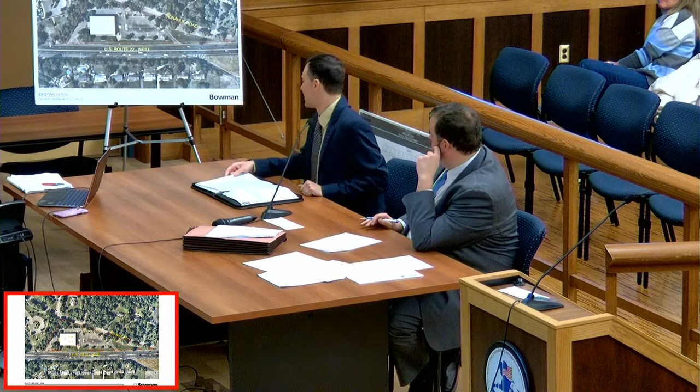Yes, certainly. This is an exhibit depicting existing aerial photography of the property in question that we're here to discuss tonight. This is Lot 9 in Block 800, outlined in red. This will be exhibit, we need a number for this, A1, thank you. So A1. Would you mark that board A1, please? Thank you.

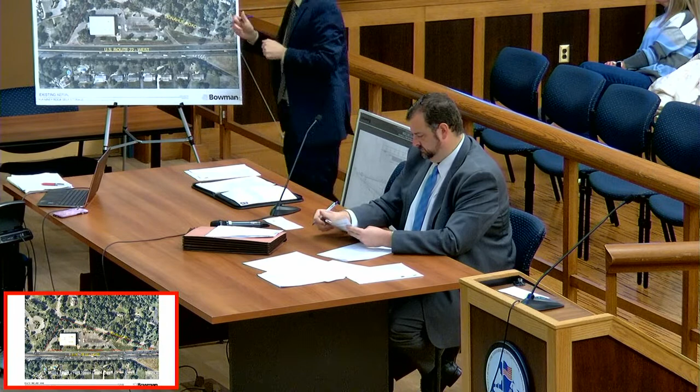All right, so our subject property is located along the north side of Route 22, which is the divided highway under state of New Jersey jurisdiction. Our property here falls within the C5 commercial and nursing home zone. The total area of the property is approximately 3.44 acres. As you can see, the site is triangular in shape. The deepest part of the lot is on the western side, and it becomes less depth until we reach the extreme eastern end, where we come to a point, which is actually where Donahue Road connects to Route 22.

As noted, we have frontage on two roads, Route 22 to our south, and Donahue Road backs up to the north.

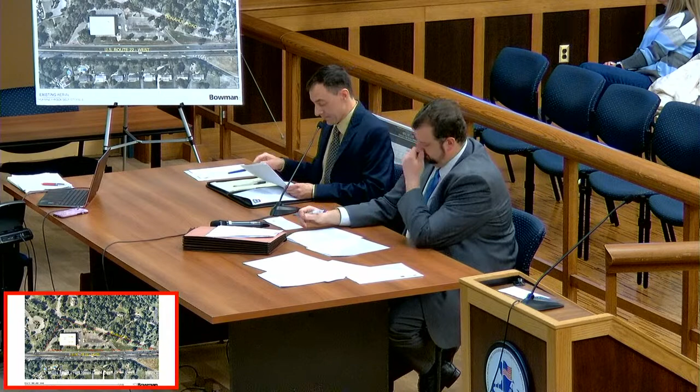The site is presently developed with a two-story office building situated on the western side of the lot, along with surface parking lots and related site improvements. The eastern side of the lot contains an existing stormwater management basin, and the surrounding area consists primarily of residential development. Adjacent uses include, to our south, single-family homes along Glen Road across Route 22. Those are at the bottom of this map; north is up on this map. Care One at Somerset Valley Assisted Living Facility is located directly to our west on the left side. There are additional single-family homes across Donahue Road to the north of the property, and just immediately to our east, just off this map, which you don't see, is a real estate agent office along Route 22.

The property slopes from the rear of the site along Donahue Road. Excuse me, you can move that microphone so it's easier for you to speak into it and for us to hear you. Thank you, I'm trying to make sure I have the volume for it. I understand.

The property slopes from the rear of the site from Donahue Road towards Route 22, with the greatest change on the west side. We're approximately 27 feet in grade change from Donahue to Route 22. As the site contains existing slopes of greater than 10% on a portion, provisions of the Township's Hillside Development Ordinance will apply to this development.

There are two existing driveways from the site, both from Route 22. There's an ingress driveway on the east side, entrance only, and a divided but two-way driveway on the west side which provides ingress and egress. There are no driveways directly to Donahue Road from this property.

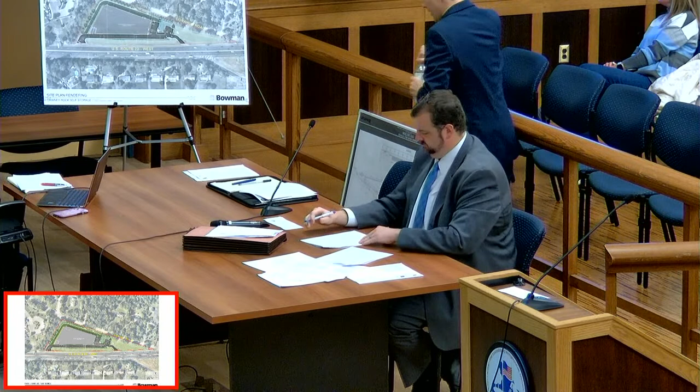This exhibit is titled Site Plan Rendering for Chimney Rock Self-Storage. This is an aerial image, the same one shown in the existing plan before this, in Exhibit A1, upon which we have placed our proposed site improvements and landscaping improvements. To match the mapping, we've colored them in, so you can see how this would look in the proposed condition.

The exhibit bears a date of November 8th, 2023.

Our application proposes to construct a self-storage facility, which includes a new 3-story building consisting of 2 floors above a cellar level, totaling 129,897 square feet. Storage units will vary in size, and a total of 876 units are proposed.

Along with this are other site improvements, including a parking lot on the east side of the building, which will contain 19 parking spaces in total.

Although the municipal ordinance does not have a provision for the parking requirement for self-storage facilities, we relied upon the Institute of Transportation Engineers' current edition to determine what parking quantity would be suitable for these uses. We calculated 19 spaces is consistent with that, and we feel that's appropriate to serve both customers and employees for self-storage facilities of this size.

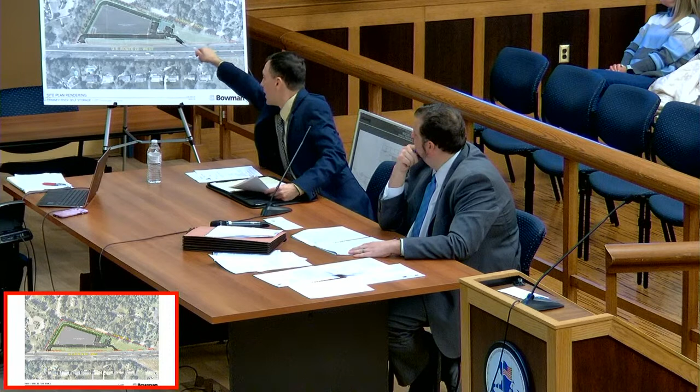Refuse, and there is an additional uncovered loading space delineated in the main parking area to the east of the building, off of the main drive aisle.

Could you point to that parking again? Certainly. That's right over in this area here. So we have one uncovered loading space here, the 2 covered spaces in the building here, and just to help better delineate, this is the main parking area on the east side of the building. Larger vehicles for these spaces can bypass and come to this end of the property.

Refuse and recycling collection will occur on the east side of the building, where there's a proposed dumpster enclosure at that location. These collection services will be managed through a private hauler.

We would like to note that we are going to resolve a design waiver issue that was brought up in one of the review letters and reduce the height of the trash enclosure from 6 foot 8 inches to 6 feet maximum, to see if we could eliminate that non-compliance.

So sorry, can you give me that number again? Yes, sir, we're reducing the proposed height of the trash enclosure from 6 foot 8 inches to 6 foot even, which will comply with the ordinance. Maybe I stated that incorrectly—6 foot 0 inches proposed, which complies. I apologize if that was unclear. Your original was 6.5, now you're going to do the 6 foot. Yes, we're going to reduce the height to comply. I'm sorry if that was unclear. Okay.

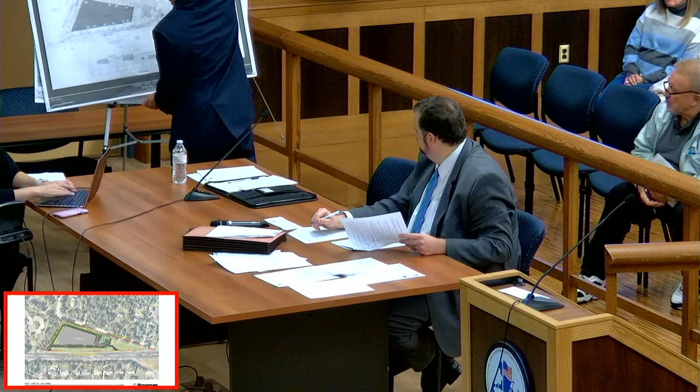And once again, Mr. Winters, identify it by title, date, and mark it as A3. Please put today's date again. This exhibit, now Exhibit A3, is titled Chimney Rock Self-Storage Site Section. The date on the exhibit itself is November 3rd, 2023.

What we are depicting on this exhibit is the grading plan from our site plan set as submitted, as well as a line illustrating the section taken through the property below. If I point here on the right side of our section view, this is where Route 22 is, which is at the bottom of the site plan view. You can see the grade comes up. The existing grade is dashed, and the proposed grade is in solid.

Now, at the particular location we've taken this, I do want to note we selected this location for a couple of reasons, although at this location we're not embedded into the hill quite as much as we are further to the west of the site. As I noted, there's more.

When you say this location, could you actually point to it, please? You can get up, yeah, it's better. I've been keeping myself pinned to the microphone so I'm heard, but Steve, is there a wireless out there? Can you hear me? Yes. That wireless works really well when you keep it very close. I'll do my best.

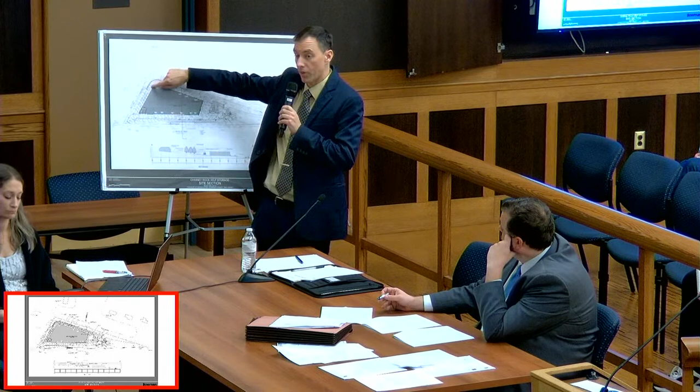Actually, I have elevation for that floor of 124.5 down here. You could see these contour lines indicating we're coming up that grade along the side of the building until we get to closer to that 134, 135 grade. So if you stand here today, and in fact, having been at the site, this isn't very different than the driveway that's on this side of the site today, which you could actually make out in this exhibit. It's right in the same spot.

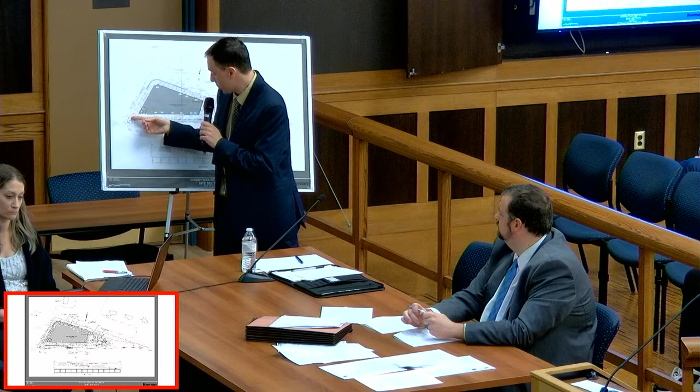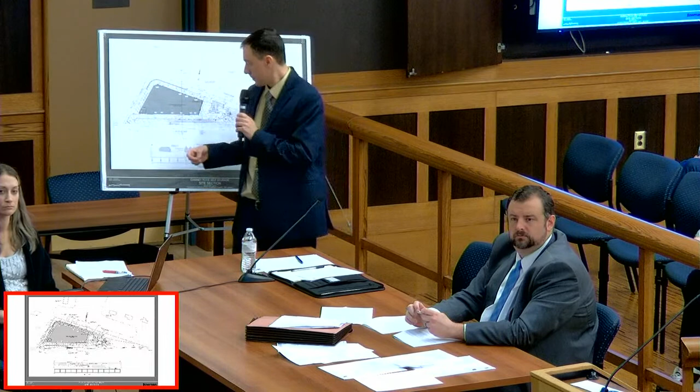So there's a change in elevation of approximately 13 to 15 feet? Along the side of the building, yes, we're going from, at Route 22, about 118, to the very back corner at 135. Thank you. Again, we're—question on the drainage, once again. Let me finish.

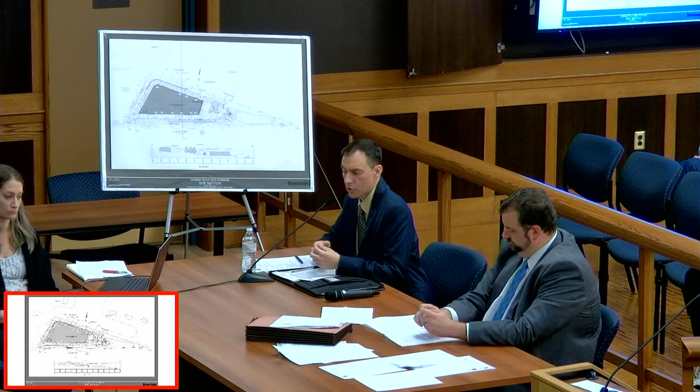So you testified early on that the steep slopes ordinance is in play. Can you tell us why that is, in fact, the condition of this property? The steep slope ordinance is in effect for any properties where you have greater than 10% slope. Different factors apply that effectively reduce certain bulk standards. So going back to my question then, if we're in play on the steep slopes ordinance, what is the change of slope from the northernmost point to Route 22?

And Mr. Winters, the reason this is important, and the reason we keep asking it and the board keeps questioning it, is because literally a quarter mile to the west, someone died in 2019. They were swept away by water. So this is so important. I'm not making any statement that your application isn't addressing these issues, but why does this board keep coming back to these points? Because someone died. So maybe you can try and answer my question again.

I just want to ensure I can best address the question in context of what we're proposing here and what we have in the ordinance. Mr. Winters, what's the slope? What's the change from the northernmost point to the southernmost point? Well, in the context of the zoning ordinance, it's not specifically relevant to what the ordinance for hillside development says, as I understand it, unless I'm missing a point. I don't mean to—I just want to ensure I'm best addressing your question, sir.

I will calculate the slope to ensure I can give the correct answer right now. The average slope along our western property line is 7.8%.

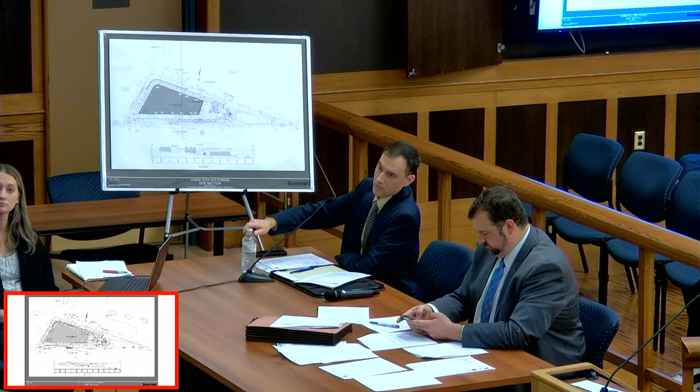So I have a grading plan, sheet 5 of 12. There's a separate sheet 1 of 1 steep slope exhibit, which was in the original submission. Had I had that, being the diligent chairman that I am, I think I would have had the answer and not asked it. So why don't we either take a break and you can supply us that information, or at some point, I'd like to see, and I think the board would benefit, as well as members of the public would benefit, to know the slope on this property.

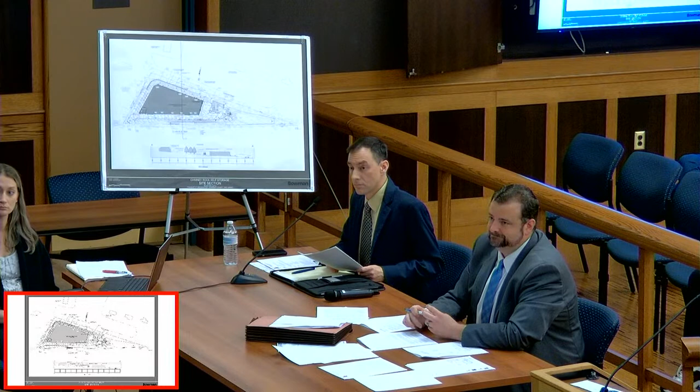Sure. And I hope the gravity of what I said, and I don't mean to be dramatic and I don't mean to play it up, someone died. I think it changed how I view every single case, and I don't want to speak for any other board members because I'm only one vote. But it certainly changed every single way I look at every single application, from resident to commercial. And I hope you really take that into account when you give your testimony. Thank you.

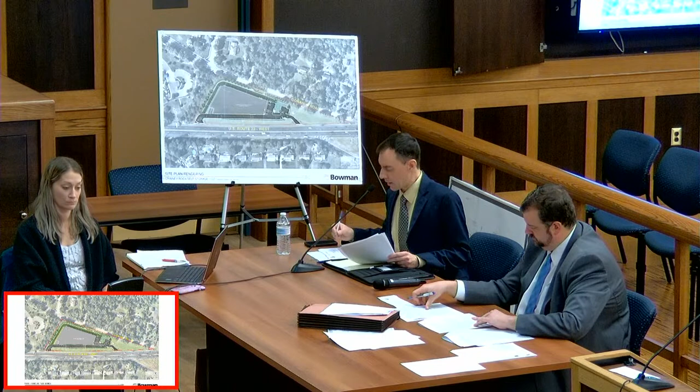We are also going to make a modification to the plan as proposed. Per the planner's letter, we were deficient on our setback. We were at 23 feet for the sign instead of 25. We will happily increase that setback to comply and provide the 25 feet setback for that sign.

So this plan is also good to point out, since I wanted to talk about lighting and landscaping proposed with this project. We'll be providing lighting through a combination of pole-mounted and building-mounted LED fixtures. A total of 4 light poles are proposed mainly in the parking area on the east side, and we're using building-mounted fixtures to provide illumination around the front and sides of the building.

The pole-mounted fixtures will be mounted at 20 feet in height, and the building-mounted fixtures vary from as little as 8.5 feet to 26 feet. The reason for that has to do with the elevation, as you'll see in the elevation views the architect presents—the front elevation, where we have more exposure of the facade, is taller than at the rear of the building. We'll have the lower mounting heights along the west and north sides, and the higher mounting heights correspond to the front of the building.

Fixtures are all dark sky compliant with zero uplight, and we've designed the site lighting to ensure there's no spillage onto adjacent properties. So the design will meet the township requirements for lighting.

The site will also be landscaped with a variety of trees, shrubs, and grasses. This includes plantings based upon the township's planting standards. The majority of landscaping is provided on and along the site perimeter. As you can see, we have proposed landscaping along the sides and the rear, as well as along the front.

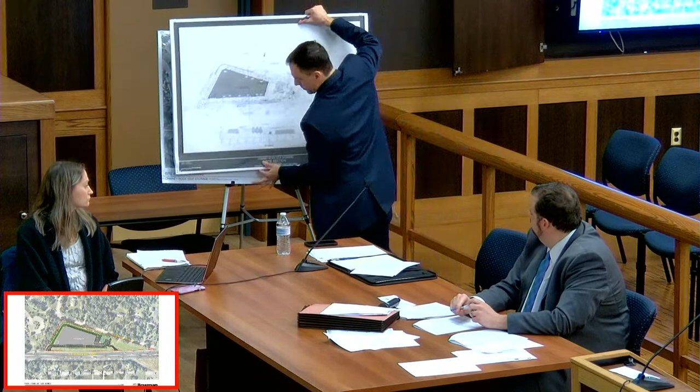This is a good moment just to talk about that. What we are showing at the rear of this building, and this is an estimated 15-foot height at about 5 years of growth for this particular species. Half the size of the building.

Not yet, but they are being planted at a higher elevation, they'll be at the top of the retaining wall. At this point, where we've drawn this, we're only at a 3-foot high retaining wall. Where we have a 6-foot high retaining wall, these may be 15 feet at that point, but at this point it's effectively 18, and at this point it's effectively 21 feet. So it's helping to absorb some of that visual from Donahue Road.

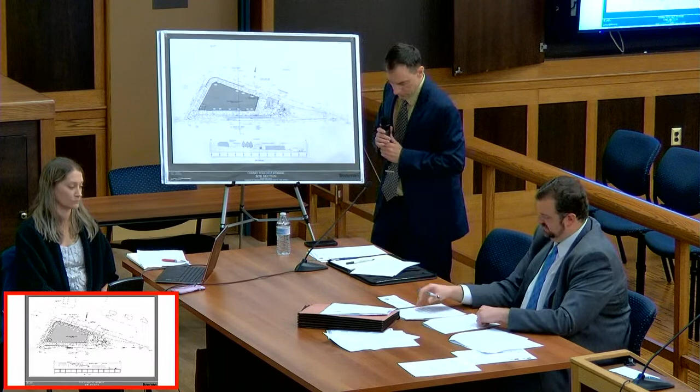Thank you. In light and consideration of the non-compliances we are looking at with some of the provisions of the landscape standards of the township, I do want to offer that subject to approval of the application, we're certainly willing to review this matter further with the planner and try to see opportunities and ways we can maximize the plantings on this property and try to be more compliant with those provisions.

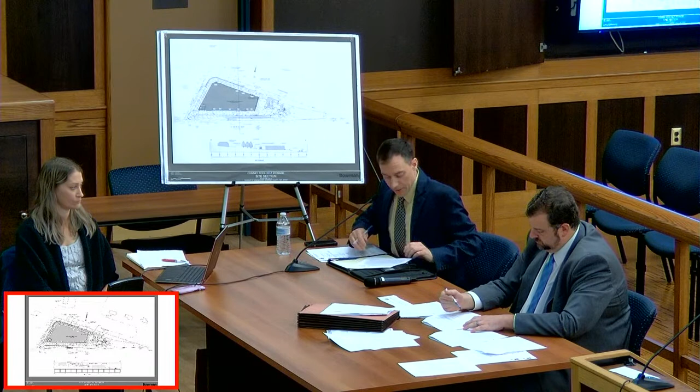Having established that, I do want to turn back to talking about utilities and stormwater a little bit. And for that, I'm just going to put A2 back up because it's more useful for that.

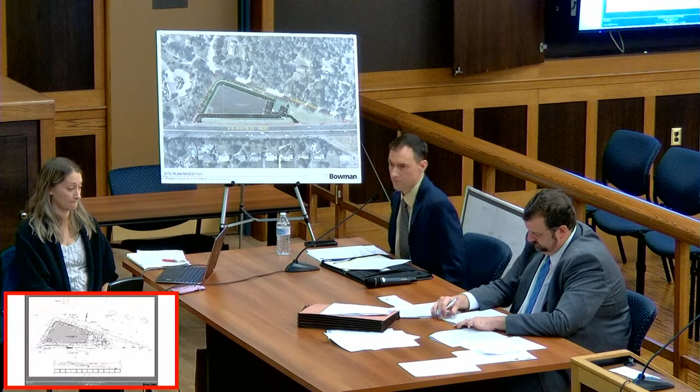We're back at A2. The A3 was just relevant to the landscape discussion, which we're going to talk about utilities for a moment.

Our project will propose new utility services to this building, including electric, telecommunications, gas, water, and sanitary sewer. All services will be provided from the Donahue Road side of the property, consistent with how they're provided today. Overall, for these kinds of facilities, there's typically reduced demand for water and sewer, which we've calculated, versus the existing office use.

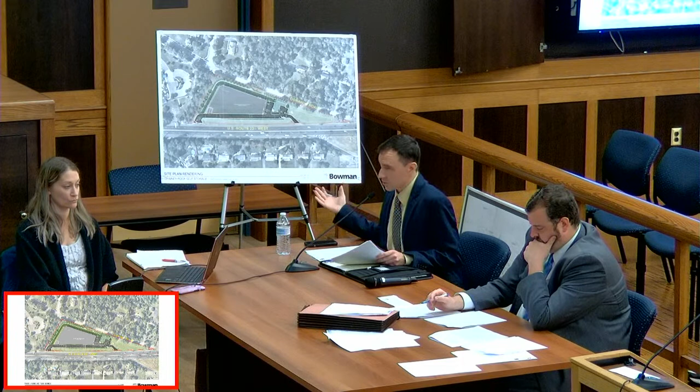Our project is designed to address stormwater management as outlined in the stormwater report submitted with this application. On the basis that our project will disturb more than 1 acre, we qualify as a major development under the DEP stormwater management regulations.

So for that reason, we've analyzed and evaluated the site to comply with those rules. There will be a decrease in parking lots, which is a benefit because that's typically associated with an improvement in water quality. We are exchanging parking lot for building on this application, to the extent that we're actually going to be increasing the existing impervious cover with additional building.

The total increase, in addition to maintaining our existing stormwater basin on the east side of the site, means that in order to account for the additional runoff from those impervious surfaces, we'll be proposing a pervious pavement system in this parking area. That's the green-colored part of the parking lot here, as opposed to the regular asphalt pavement sections, and that'll be sized to provide additional quantity control and attenuation of flows before they're discharged from the site.

Our system is designed to meet the current DEP green infrastructure standards. That is an approved green infrastructure best management practice, so we can comply with the quantity control requirements, and all other requirements in our report are noted as addressed. We don't have any further obligation to meet water quality requirements by virtue of the reduction in vehicular pavement surfaces.

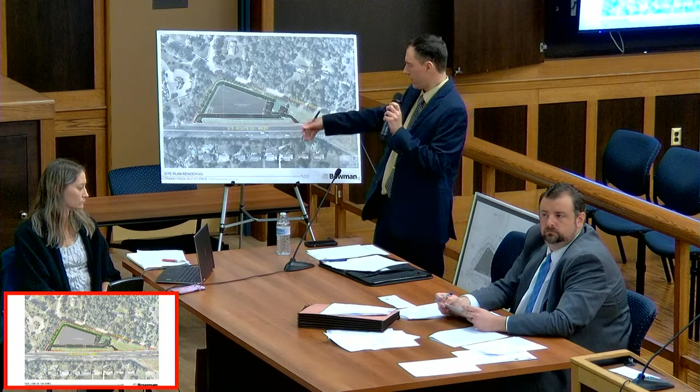Yes, where your pipes discharge into your retention basin. So the surface of this is in the 132.5 to 134.5 range, then we have a layer of paver stone underneath that. The discharge elevation is set to ensure we have positive drainage to the detention system, the existing basin, so we'll be piping in this direction so that everything continues to drain towards the eastern part of the site. Okay, and the eastern part of the site is more of the high point?

The eastern part is, the grade on 22 is a little higher here, but compared to this part of the site, everything drains in this direction. All right, so do you have the pipe invert elevation of where it discharges? I may have a sheet with that on it, if you could bear with me one moment.

The invert out of the underground detention portion of the pervious pavement is 129.0. Okay, and then on the west end of the site, where it exits onto US 22, what's the elevation there? The roadway elevation at Route 22 is about 118, 117. Okay, so it's 10 feet lower than the retention basin.

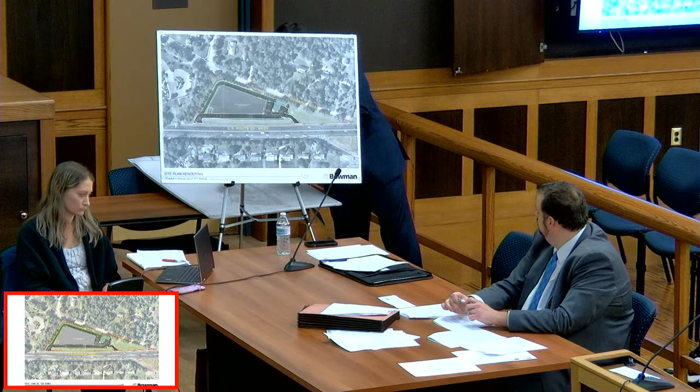As currently designed, a portion of the site in its existing condition... Okay, so all that water on that side that's lower than the retention basin, where's all that water going? Much of that water directly discharges towards Route 22 today.

The DOT only permits stormwater to continue in the direction of flow, so for portions that currently drain in that direction towards that driveway, they're going to continue to do so in the proposed condition. We're not increasing that; we're maintaining existing drainage patterns.

Question: if it rains an inch an hour for 6 or 7 hours, will that detention basin be able to accommodate that without overflowing? Our basins are designed to the standards to account for all storms up to the 100-year frequency, which is the 1% chance storm, itself a 24-hour duration storm. Right now our requirements are more than 8 inches over that time period.

High-intensity storms are considered in water quality calculations, but what I can offer is that the design does comply with the requirements in place, and since we're under the current stormwater rules, that includes the current iteration of the stormwater regulations, which are more restrictive than prior ones. I'm not an engineer, so I'm not sure I understand — if it rains an inch an hour for 6 or 7 hours, will that detention basin accommodate that?

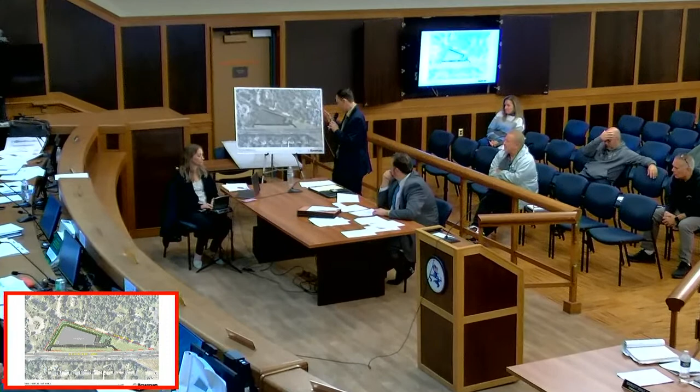In the existing condition, this part of the site is developed and it drains this way. The existing driveway, much like this proposed access, runs at a lower grade — it comes down quicker. This little portion of the site, in the existing and proposed conditions, discharges right to Route 22, and we're not increasing what's going to 22 as a result of this application. Everything going this way, we're going to deal with in accordance with the rules and proper design standards, which is why we have the additional storage.

Mr. Winters, there's no pumps in this plan, so no need. Basically, anything at 129 feet or above is going towards your basin, correct? Yes, anything higher than that is going to the basin. It connects into systems on the eastern side, which are at a lower elevation than we're detaining the water, so that way it can get out.

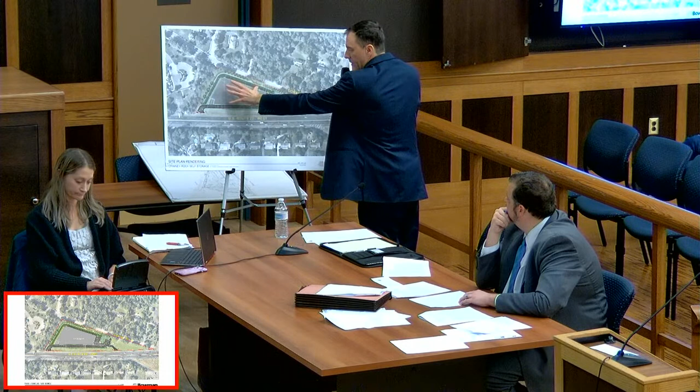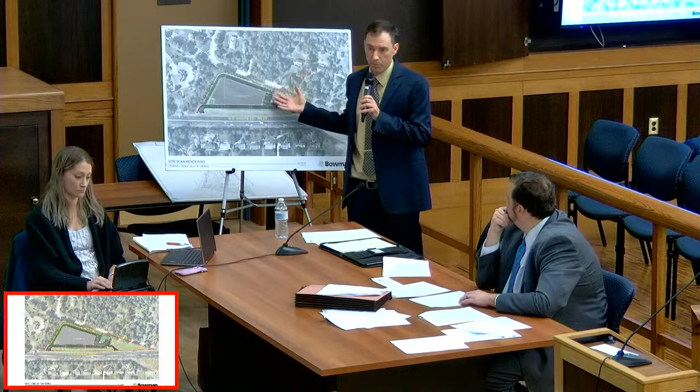The exception here is that this pocket of the site, beyond this point, we're at elevations 134, 132, 130. From about here down is where we get to a point lower than that, and once we get beyond a high point, there's a portion of the site that drains directly to Route 22. So that doesn't influence this system. This system continues to function to take the majority of the site in that direction. Again, we're matching drainage patterns because that's what's obligated to us — DOT in particular requires we match drainage patterns. So we've designed it in accordance with that. To your point, we're improving the site by providing additional storage of stormwater in this part of the site.

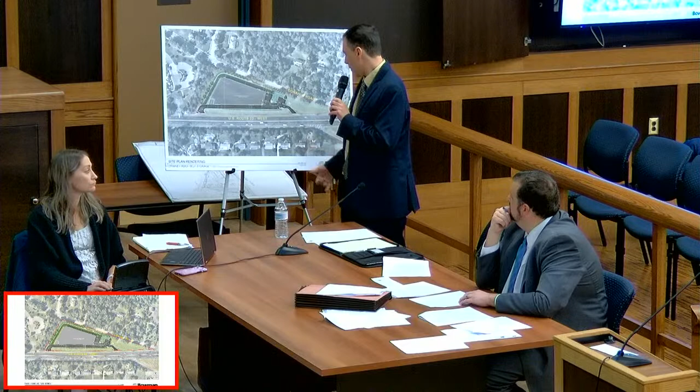So we can hold back, attenuate those flows, meet the required reductions in peak rate of runoff, things required under the rules. Paul, your comment just now in response to the chairman's question that pumps aren't necessary is because pumps would only be required if you're servicing the drainage at lower elevation on the west side, which you're not, because that's an existing condition, unaffected by our proposed building. Yes, that's a correct conclusion.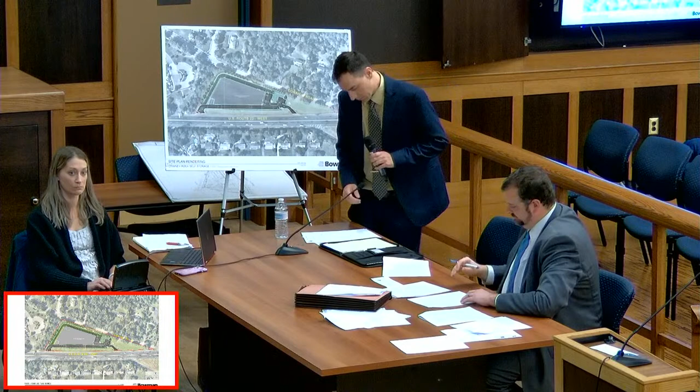Just to add to that, Mr. Chairman, if I could touch on the DOT coordination on this project - have you already filed with DOT, and have they approved the proposed drainage configuration and drainage patterns being put forward on the plan? We're preparing that now. I was just about to get to my traffic testimony, and what I was going to note is we're actually going to be preparing a letter of no interest based upon the trip generation and the fact that we're not altering driveways. We will comply with the stormwater provisions DOT requires. Obviously, if we change something, they will need to approve that.

Right, okay. And just to confirm, the entire roof area will be managed by the new additions to the system - none of the roof area is discharging. That is correct. So the majority of the impervious area is all going to be managed through the basin on this side of the site. So we're capturing all that water.

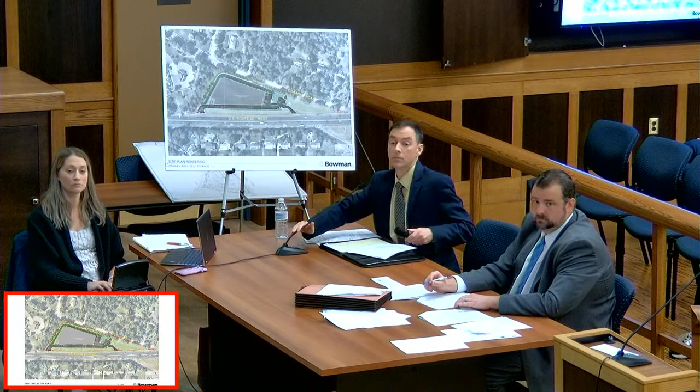I'd like to proceed with the traffic unless we need to touch on anything else. Are there any more board questions on wastewater and drainage? Board professionals, are you good? Moving on?

I just want to handle drainage right now, wastewater - I want to make sure we're all satisfied because this is very important to everyone here, I know. Mr. Chairman, I'd just like to comment that after a major rainstorm, maybe once a year, there is actually debris brought down Donahue and Vossler to the east of this site. It's not a 5-year, 10-year reoccurrence - it's actually fairly, a one-year storm is pretty much the interval, but that is something.

So is the applicant aware of that condition on the site? I'm not personally aware of that condition. It is possible to have higher intensities with shorter duration storms, like a water quality event, that may make that happen. A summer storm tends to move things more than you might expect. So that observation doesn't surprise me, but I wasn't specifically aware of that condition here.

All right, thanks. So then the retention basin doesn't factor in any runoff coming off the mountain - is that what you're saying? It's only factoring in runoff from the site? I mean, it's a mountain there, we talked about the slope a little bit. It's primarily our site. In our stormwater report that we submitted, we delineated contributory areas to the different parts of the site. I'm aware there are some inlets along Donahue Road, existing condition, that pick up some of that Donahue Road drainage. Anything we delineated that was outside of that may actually be in our numbers if it contributes to our site.

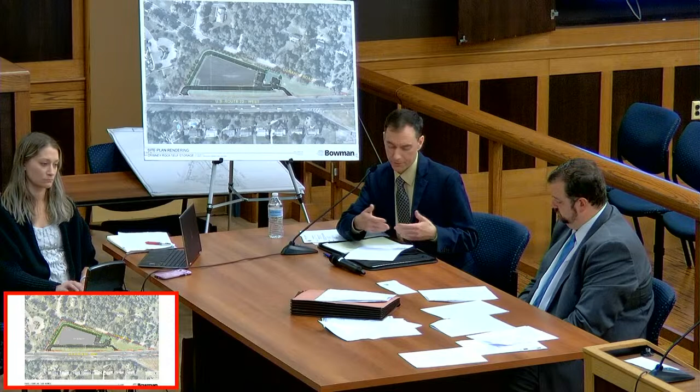The data given here, regardless of the hours of operation, the ITE establishes peak flow. The Institute of Transportation Engineers establishes criteria and rates related to different uses in different parts of the country. With that information, we can estimate what would happen in the peak AM period, generally 7:30 to 9:30, or the PM peak period, generally 4:30 to 6:30. The weekend, Saturday peak, is generally 11 a.m. to 2 p.m.

Now, Mr. Winters, not necessarily you, but what are the hours of this facility, so the board can weigh this testimony? And if you don't know, you can say you don't know. My understanding is we're open, but I'm going to allow the applicant's operator to speak about that. You don't know definitively? No. The applicant here?

Before you do, just state your name for the record. Please identify yourself. Matthew Lang, co-founder and CEO of Snapback Self-Storage.

As it relates to hours of access and operating hours, the site will be open for customer use from 6 a.m. to 9 p.m., 7 days a week. The office, staffed by 1 to 2 employees, will be open 9 a.m. to 6 p.m. Monday through Friday, and on Saturdays from roughly 10 a.m. to 2 p.m., closed on Sunday for the office.

So you're not a 24-hour facility? We're not. When we come into new locations, we match the market. In this market, the standard hours for access across every location in the area are 6 a.m. to 9 p.m. If someone stores things in your facility and gets a code key or access code at 9:01 p.m., they will not be able to access this facility?

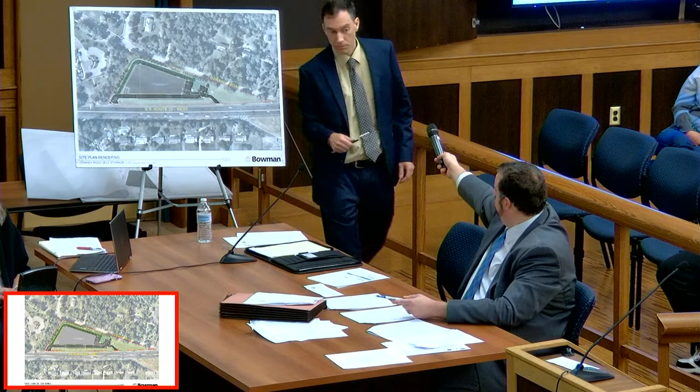Thank you — the two loading spaces on this end are striped at 30 feet. There's a little room behind them, an additional 6 feet, but they can accommodate up to a 30-foot length truck. This loading space can accommodate up to a 50-foot length truck if needed, but that's larger than what they typically see at this kind of facility.

Right, and there was a question in there — what would be, for an individual with a standard automobile license, the longest truck someone could rent? I unfortunately don't know the answer to that. That's it exactly — not a commercial license, just standard residential — what length truck would that be? I guess, would that loading dock accommodate the largest truck that an individual with a standard Class D license could rent? I'm going to see if the witness who's going to operate this can offer on that. My expectation is we are accommodating the size they need, because this is a building they've reviewed and are content with this provision, but I'll let them speak to whether there's any concern.

Sure, thank you — and the answer, if we need it: Mr. Vesco, it looks like the largest U-Haul is 26 feet. Okay, thank you.

My other question is on the parking spot. The ordinance generally calls for 9.5 feet by 18 feet, and you're proposing 9 feet by 18 feet. For this type of facility, what are your thoughts on reducing the stall size, considering the activities someone is performing with their car?

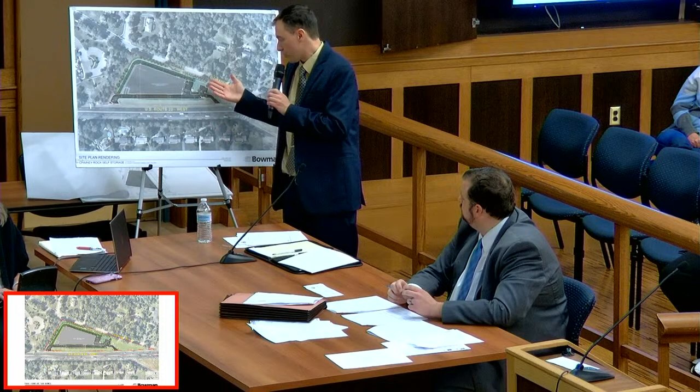Understanding that's the standard for the 9.5 in town, the 9 foot is, in most instances including several other jurisdictions, the standard 9 by 18. So it's not a compact space by any stretch, but understanding it's less than required, I noted earlier one reason we're not concerned about that is we're providing additional room at these front spaces. So if people have something larger they need to unload and need the side doors for, they have that option. I also feel since we have more SUVs with rear hatches, that's not as much of a limitation as it might have been with sedan loading.

But at 9 feet width, we're not significantly narrow compared to a standard parking space. We're actually at a standard. It just happens to be highlighted because it's a departure from the standard, and I wanted to ensure that was noted.

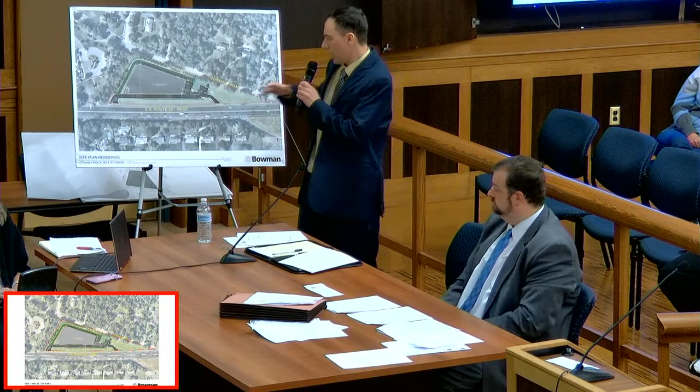To comply with that would either require a reduction in parking spaces under the current footprint, or some additional impervious cover to accommodate the extra half foot per space. I have almost 7 more feet of width on this side here. And that would be on the assumption that everyone showing up at the same time would have to open their doors, which is not necessarily what would happen.

Other than that, what do we have left? Just briefly wanted to touch on outside agency approvals that are or may be required for this application.

We have already applied for and been granted approval from the Somerset County Planning Board, completed in July. We have filed with the Somerset Union Soil Conservation District, and they have also certified this. These have been reviewed and found consistent with their standards, with any comments addressed. We will be filing a letter of no interest application with the DOT, as we're not producing any traffic that achieves the level requiring any other permits from DOT, and we're not changing those driveways.

Apart from that, we wanted to speak briefly about other reviewer letters. We did talk about the fire review letter up front. We also received a letter from the sewer utility, which we have reviewed - the letter of November 3rd from Mr. Genova - and we can comply with all comments noted in that letter. No objections to Mr. Genova's comments.

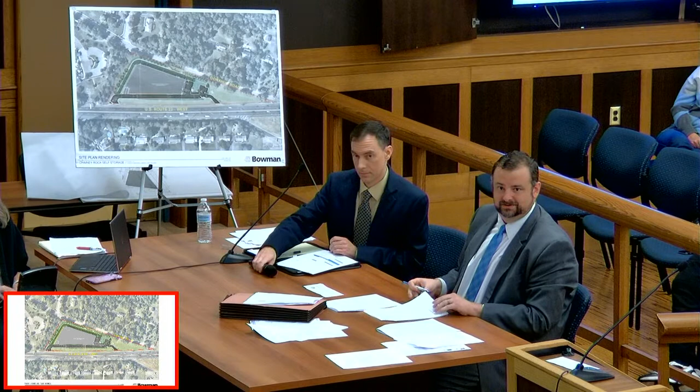Is there a list of the things that your testimony is relevant to? Because we have numerous requests for variance or design relief and so on. We're trying to follow along, but the scorecard gets confusing. Maybe as a suggestion, if we started with 'we're asking for 22 different things to be relief from, and I'm going to provide testimony covering 12 of them, here they are,' that would bring more clarity to the case you're trying to present. Right now I don't know what those are because honestly I've lost track. I don't expect members of the public were following along - if they are, maybe they can explain it to me when they get up. But right now I'm not clear.

We can certainly do that, and I think Ms. Doyle's letter is a good place to do that. Yes.

I think that would be helpful because I've only been on this board approaching a decade, and I've never seen this many variances requested in one case. Not a judgment, just a fact.

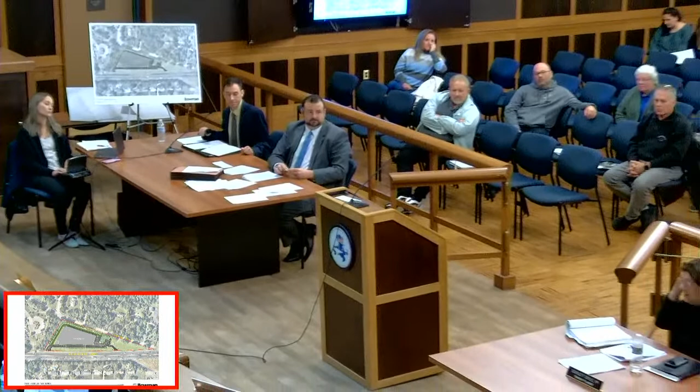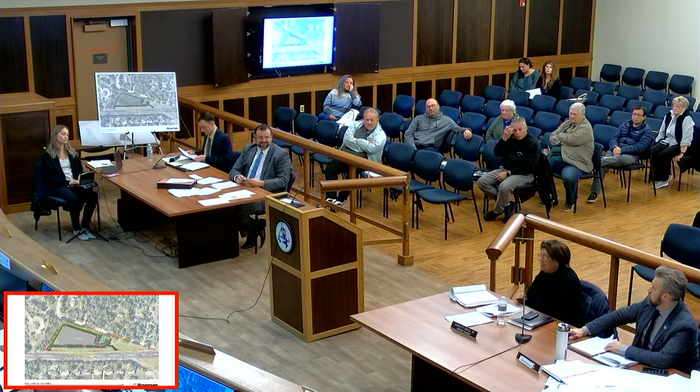Created at the wishes of the owner, the engineer does the design, and the planner is expected to make it work. The planner is expected to say it's reasonable, but that's not the basis upon which a C variance should be given. It should be based on hardship - is it narrowness, slopes, wetlands that would prevent a designer from creating a 9.5-foot wide stall? So don't leave it up to the planner to try to save the day. The engineer should, through all of these - other than the fact that you've got a unique geometry of the site, we know that - I'd like very much for the engineer to say it is not possible to provide the 50-foot conservation easement.

It's not possible to design a lot coverage in accordance with the ordinance, irrespective of the fact that his client doesn't want him to. We're talking about the land, we're not talking about the owner. We're talking about the land, and that's what I'm afraid might be missing in his statement. So if he can talk about it in those terms, and if I could have the right to interrupt, that would be really helpful, so that the board knows. You always have the right to interrupt, no matter what.

Thank you so much. Thank you. Thank you.

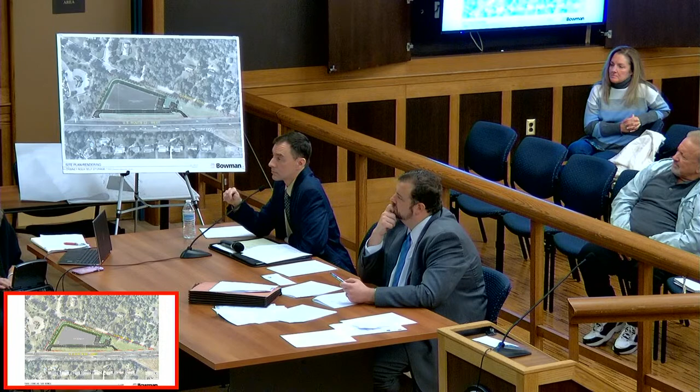Can we pull up the image of the slope again? I want to talk about, I couldn't find it in my packet. I'm sure it's... A3, thank you.

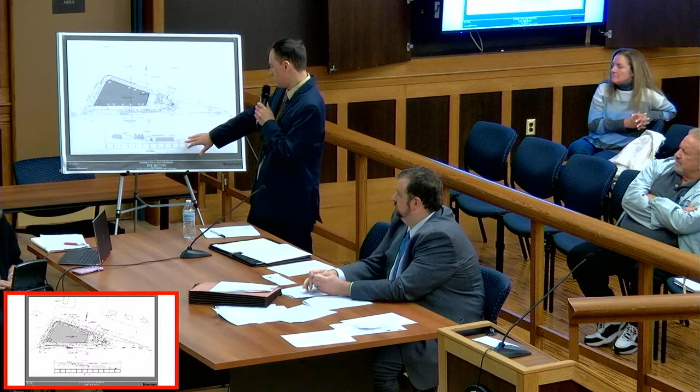Again, there's a neighborhood back there. You've got a giant flat roof. I'm trying to understand, I'm trying to get clarity on these sets of trees. So from right to left, we've got the building, we've got a small set of trees, and we've got some space, and then we've got some large trees. Can you just identify for us what is what?

This is a rough representation. There are trees that are along this side of the road. They're outside the right-of-way, they're over here. I just wanted to account for them in this, just to understand what's there today. But there's a wooded area here. There's a house here that sits so far back, it didn't even make the exhibit. And there's wooded areas that fall in the front of some or most of these houses.

Yeah, I'm familiar with it, I was there. Okay, what are the bigger trees, is that what you're saying? Those existing trees, those are the big trees there in your image? Yes, these are the existing trees. Those are existing, okay. So your trees are the little ones, at planting, that's what your trees are. Yeah, but I mean...

You're showing 3 trees in a row, but the guy in this house, when he looks out his window, he may or may not see those trees, but he potentially is looking at the roof of your structure, correct? We provided an approximation of what a sight line we think would be from the house back here. And from that elevation, you could see we're hitting that corner, and that's looking almost level across. We're at that corner of the building. Now, this height of the building isn't more than a couple feet higher. I think the existing is 22 feet, and we're 26 now. So there is an existing building of a similar height on the property.

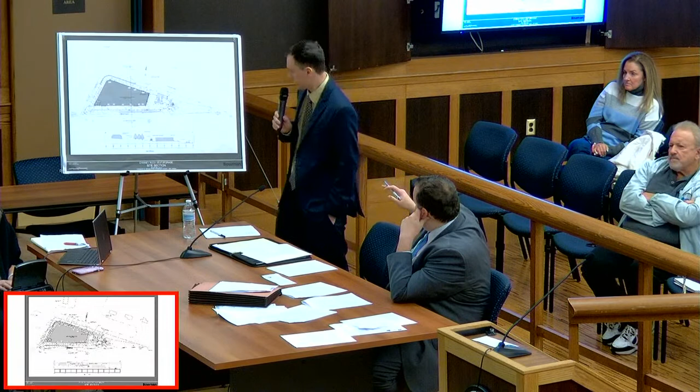That starts to hide this a little bit more from that buffer for the first couple of years. The difference in height between the existing building, understanding it's more narrow than the proposal, but the existing building is about 4 feet. That's correct. And the view that those residences have now beyond that building is the same height. Yes, so if I continue to look down the hill, just like today, if your view is not blocked by a building today, you see Route 22.

Arguably, this building will actually block more of the view of 22, but that's a preference of what you want to see from up here. It's just stating a fact that this is a bigger building.

I understand. Okay, and listen, 21 trees removed is something that is a headline, frankly. So can you point out to us on here roughly where, not all 21, but you can give us an idea, because we've got a lot of families, a lot of neighbors here, and I darn well know if it was in my neighborhood, I want to know exactly what trees are coming down. I can actually show you a sheet from our site plan set, which is worth showing.

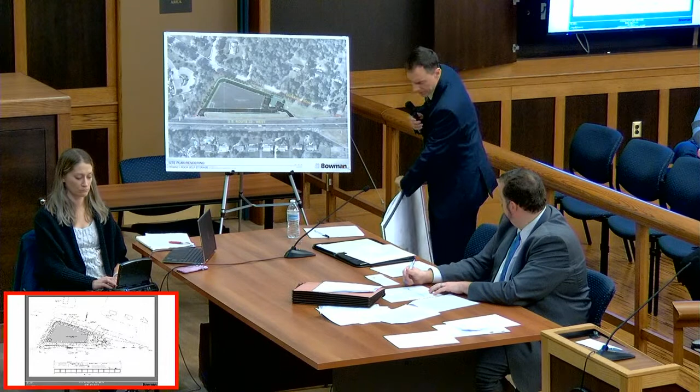It's part of the record. As this is in the set, I assume we don't need an exhibit. Right, that's what we have already? Yes, this is sheet 3 of 12 of the preliminary and final site plan and use variance for Chimney Rock Self-Storage, revised through July 31st, 2023.

We've identified trees that are going to be removed by putting an X through them. It's about 50-50. I would say about half of them are falling in this area because this is where we're going to be expanding the area the building is going. If you see this curve here, that's close to where the retaining wall is going to go, so the trees in this area will be affected by that construction.

The trees in this area will be in the fire lane when it's constructed. With the configuration of the additional parking on this side of the site, there's also some trees over here. These are smaller in contrast in some of these areas, but there's trees we're going to be taking down on this side. So it's not all in one spot, we've spread them out.

But just to clarify, this is where those trees would be removed, both that area and this area. Thank you, that addresses that question. Okay, thank you.

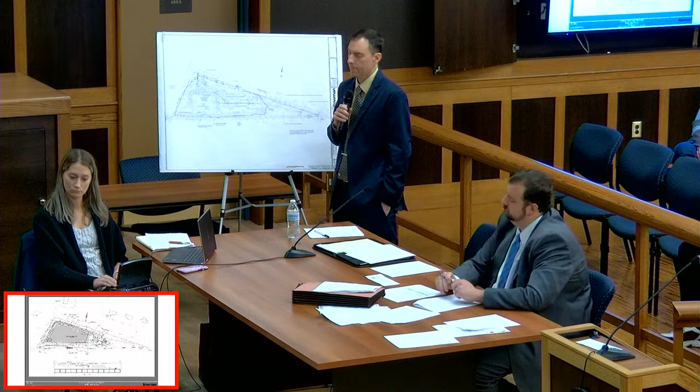One last thing, and I think I can probably get this from the architect, but in the interest of those neighbors and those homes, are they going to be able to see people loading, or no? I don't think they are. Are you saying most of the loading is just east and southwest?

Yes, the loading, the identified loading spaces, the covered loading is going to be on the Route 22 side of the building. So that's totally hidden by the building from the Donahue side. If you're talking about that side of the building, there's the extra loading zone that'll be on the right side, which is actually on the Route 22 side of that parking lot. Between the building and the landscape we're proposing, those don't fall in that view shed really from Donahue.

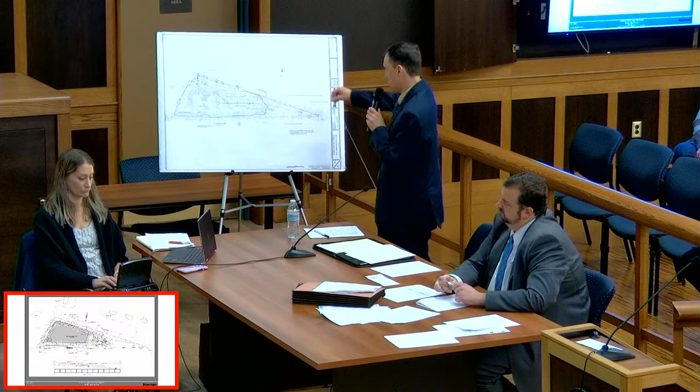So there's no loading on the Donahue side, right? Correct. But there is loading from the Route 22 side. I see it now, I don't think I actually saw it. We'll see it more with the elevation in the bottom right corner there. That is a loading area, so you're loading on the 22 side in two spots, the bottom left corner and the front right corner.

Just to help answer that question, as I shuffle the exhibits once more, I'm back to A. Actually, you're loading there too, so you've got your loading bays. You got two loading bays on the left, and there's another opening.

You can't tell me that there's people not going to park in front of that building. You're testifying that nobody's going to park in front of that building and load right there? Well, it's certainly not intended for them to use the aisle in that way.

Can you just put your hand to the bays, the two 30-foot bays, and then just go to the right there, right next to that. That's not loading? No. Okay, I'm sorry, there's no doors out here. Oh, what is that, was it windows? I believe there's windows in that.

I'll allow the architect to. All right, fine, talk, fine.

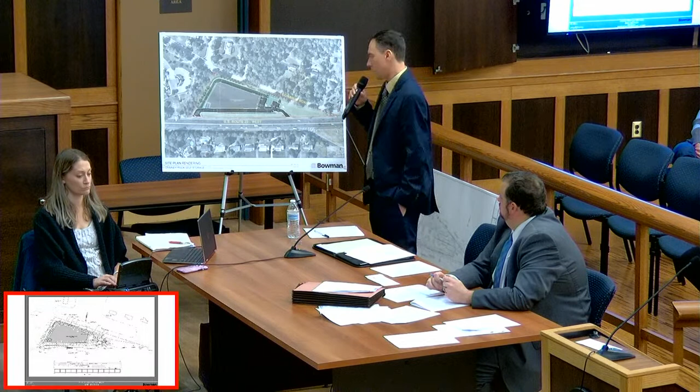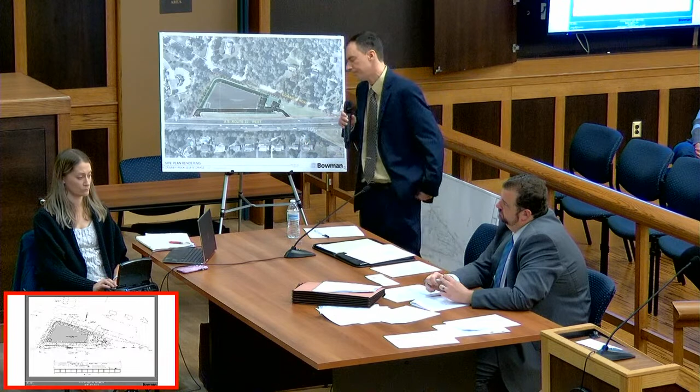Okay, so there's no loading on the 22 side except for your two bays, is that what you're saying? The two bays are loading. There's that one delineated loading space right here, on this side of the parking. Right, north side of the circulation drive, south side of the. Okay, so folks from Donahue will not see loading, folks on 22 will see some loading. Okay, great, that's all my question, thank you.

That was all. Any other board questions? All right, Scarlett, before we come.

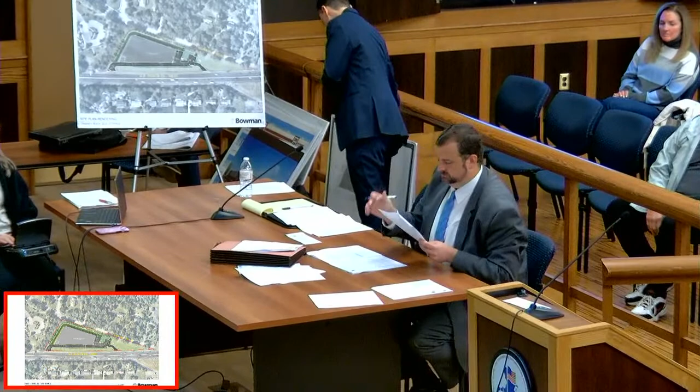Mr. Winter, did you want to clarify dimensions on the Exhibit A3? Yes, there was a point when I was speaking about viewing from the Donahue side on Exhibit A3 that I failed to mention, that I just wanted to clarify since we have it with us tonight, A3 exhibit, once again.

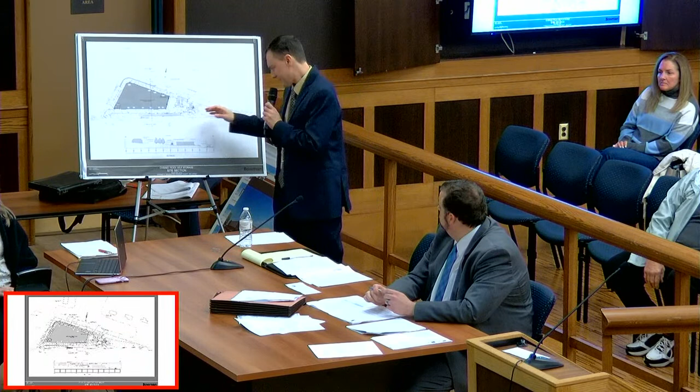It had to do with the view from the uphill side. I had mentioned that our building height was only a little taller than the existing building. But what I neglected to mention, we show a sight line going to the building because that's probably the board's primary question, can I see the building? I want to bring the board's attention to the fact that this sight line, roughly level with your standing point here, maybe a foot or two higher, is this corner of the building from my eye back here. Everything above that, above horizon, I'm looking beyond the building. So this building isn't even in the view looking in an upward direction from that point.

That was a point I wanted to bring up, which is not dissimilar from the current condition where you may see the existing building, but you can also see above and beyond it. So we're not blocking out light or anything with this building, not just because of the distance, but because it's only that high relative to the viewer's eye.

Since that was directed to my question, if I may, because you brought it up, I actually thought about it during the break as well. But let's talk about the folks on the other side of the highway. I think Scarlett brings up a great point about the lighting on 22, but also what's their view going to be? That would be their backyards, from Glen, right? From that 35 feet lighting that's above the roadway, what is that going to equate to in those folks' backyards?

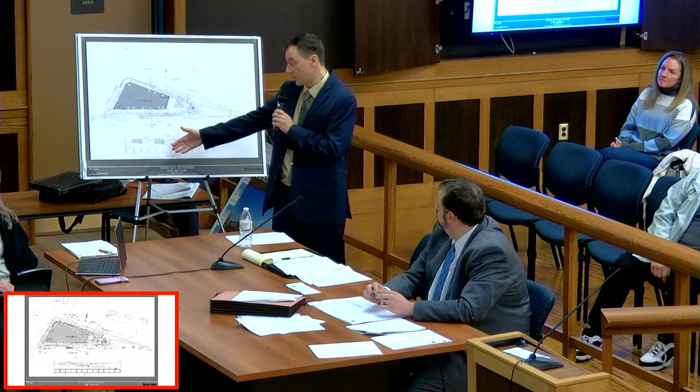We could look at that. My recollection is that beyond 22, you have rear yards. There's some trees and such along the back of those properties, rear yards, and those houses front on Glen Road, correct me if I'm wrong. On that side, I believe they're also at a lower elevation. So as this slope comes down, it continues somewhat in that direction. But I would have to look into that and see how that compares to provide a more clear answer.

As you were making a comparison to the existing building, saying that if I'm on Donahue or in one of the houses on Donahue, looking over the building, essentially it's not necessarily something that impedes my ability to see beyond it, so I may or may not notice it. Does that capture what you said pretty well? I believe so. Okay, yeah.

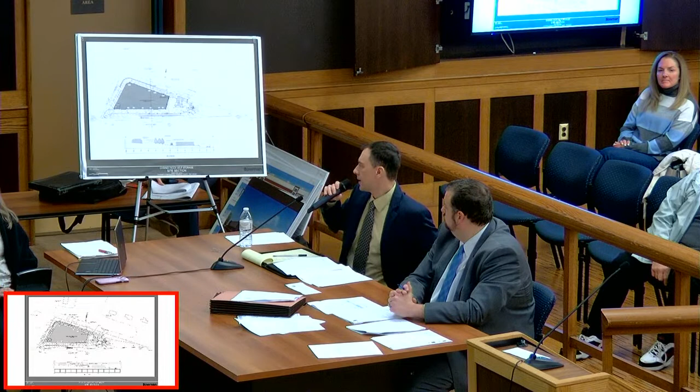But the mass of the proposed structure, if you were to compare it to the existing structure, is twice as big, three times as big? How many times as big? I will say more - all that gray shaded area on your diagram. It's clearly more than twice as big if I were to just look at it. I don't have the exact number, but it's close enough. So what we're saying is, even though we're looking out over it, we have a much bigger mass, and although we can't look around it to the extent we can currently, that's correct. We can still see above.

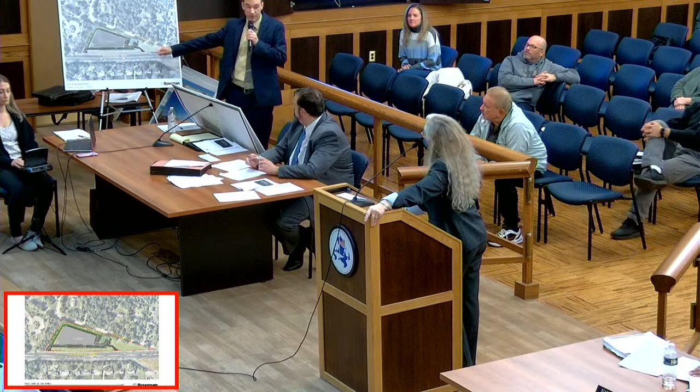Convenient truck access - this is the first access point for the site, so this really is the primary point. I would expect the majority of all traffic will be through this entrance. This entrance will stay because it was there today and there's no reason to remove it. Our main egress, of course, is here. So to your point, I believe we are satisfactory with the egress, with the entrance side, with the slopes.

And just because I'm always cognizant of the transcript, it's not going to know where you're pointing to. Oh, I'm sorry. At the easterly driveway, the one-way ingress has a 5% maximum slope in its existing condition, which will remain. And that's the access on the eastern side. Correct. Are there any restrictions on the size of the truck that will be permitted to access the site?

No restrictions. So if an 18-wheeler came in because somebody was moving and didn't have anywhere to store their things, they could come onto the site? And can you demonstrate how that would be able to access the site safely and make turns?

That's not a vehicle that's intended to access this site. It's not who this is marketed for, I think is a way to put that. If your question is how do I stop a truck - well, a truck will go where he can and not go where he can't. That's a simple answer I can give. It's not a technical answer, but yeah, they're not intended to be served by this facility.

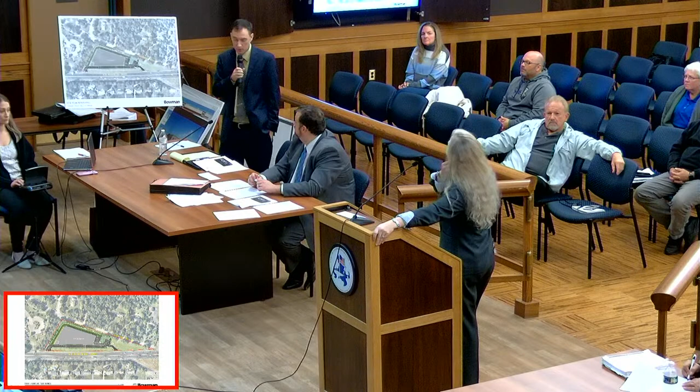But the existing site exists, right? There is a building there that works. That building doesn't comply with current zoning either. Not with current zoning, no, I understand that. It could be repurposed, of course.

Up to him if he wants to answer it. I suppose it's rhetorical. So the question was rhetorical? Well,

I am trying to determine whether or not you can reasonably develop this particular piece of property within the vast majority of the bulk requirements. That's a good question, though. I was curious. Could you repurpose this building? I wouldn't put repurpose in the redevelopment, because that's almost like saying we have a new tenant. You can just say hypothetical, I'm okay with that answer.

And anything I would call a redevelopment and application, we would be before the board with redevelopment. We know the setback limitations and the other limitations. I'd still be inclined to say no. There'd still be a number of compliance issues for anything. Thank you, do you think there would be 22 compliance issues? Potentially. Really? All right, I can say that safely, potentially.

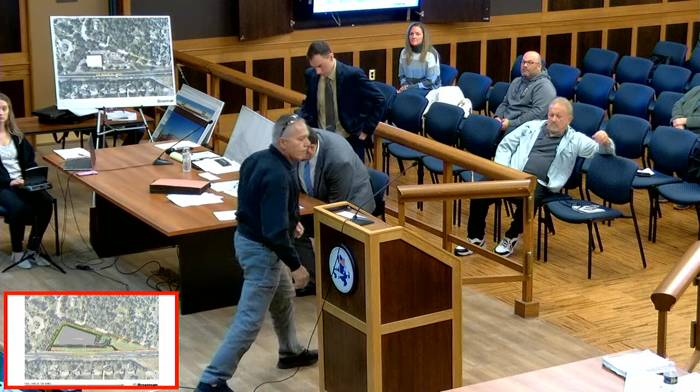Now, with the way it's set up now, we're inundated with water every time it rains. And if you're doubling this and tripling it, and he said from the middle over, it's going to go into the basin. From the middle to the left is going to be dumping on 22, and that water ends up on our property.

As you see the sewer, give you this one back. I've marked this photograph as O2, can you just tell us what that's a picture of? As you see the sewer, this is the eastbound side of 22 where it dumps into our property. So that's the outlet? Yes, yes. And there's 3 sewers on the westbound side that dump on our property. And yeah, here's another picture, standing in. I'm assuming you're getting to a question with all these photographs.

Okay, are they going to do anything with the sewer system that's existing there? Or the westbound corner of the property is 15 feet higher than the eastbound side. So if you're going to put 15 feet higher with another 20-foot light on there, that's 30-something feet of light. And how many light posts are you going to put along that property? Wait, so before you get to the light bulbs, the sewer structure. Yeah, will they do anything with the sewer system and clean the creek out, or put a pipe in, or do anything?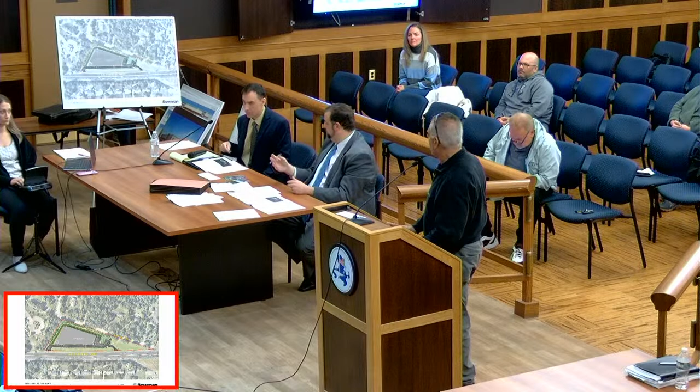I think they may be able to better indicate frequency and operation as far as when people are there. Do you have a number of how many people come in and out on a given day, and weekend, Saturday and Sunday? Information right now, no. From a design perspective, you base the number of spaces on the use, ITE. Yes, we base the number of spaces on the use. The Institute of Transportation Engineers identifies parking demand for different uses, and the parking demand associated with a use of this size—19, I think it is now. The Institute of Transportation Engineers Guide provides documentation and analysis on the number and demand for parking spaces for different uses, and that was the basis for our calculation of 19 being appropriate for this kind of use.

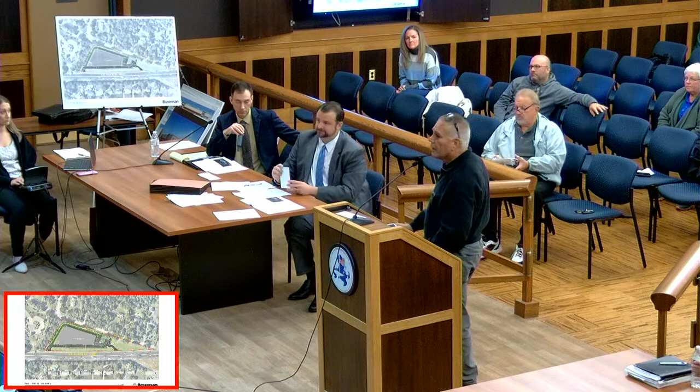Just my main concern is the water, because we're getting flooded in our backyards every time it rains, and I feel that you're doubling the square footage of the area. We're going to get a lot more water. Hopefully you guys look into that more, that's all. You'll have an opportunity to come up and make statements at the end. Thank you. All right, thank you.

All right, we're going to do one more resident. It's 10 o'clock, we typically stop, but we have a full house here. So please, sir, come on up.

Good evening, everyone, thank you for coming. My name is Stan James Buczkowski—B as in boy, U, C as in Charles, Z as in zebra, kowski. I'm on Glen Road, dead center on the building. For years, we've had this property since 1963. I grew up on that property on Glen Road when it was a cow pasture back in the 50s, so I know this area very, very well.

And I'm telling you, we get nothing but water coming from about the fourth house in. I'm going to just call you Mr. B for my own sake, okay? But you'd have to just ask questions right now, not me. Oh, okay. I promise at the end of this case, you can speak as long as you want for or against the application. I got you.

Okay, my question would be on the traffic, on parking. You said the main traffic would be coming in from the east side, coming down, and then backing into the 2 spaces allocated in the front of the building. My concern is what the woman said earlier—where's somebody going to turn around? Are they going to drive around the fire lane? What if there's a fire? Are people going to be parking elsewhere? I just can't see 19 spaces being enough, and I don't see anything required. Where are they going to park? My question is, I don't see anything for ADA-related parking or anything like that.

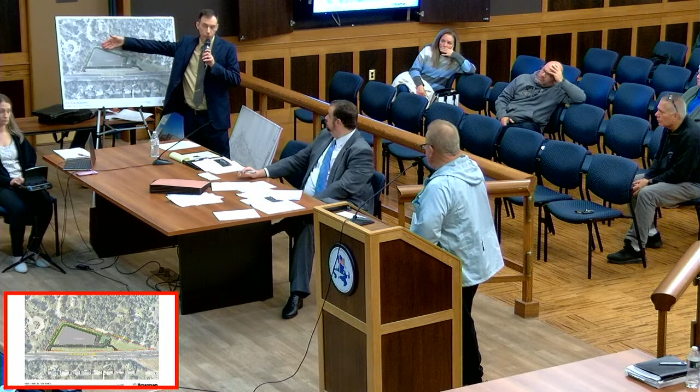Like buffer, I see you have the shrubbery straight across. Sometimes when you stagger shrubbery, you can get more of a deadening sound barrier. We do propose staggered shrubs at the rear. We have the landscaping, which I expect we're going to look for ways to increase even more.

Do you have any of that on the front of the building that would help him? Thus far, as testified, we've provided landscaping in areas that are not encumbered by this sewer easement.

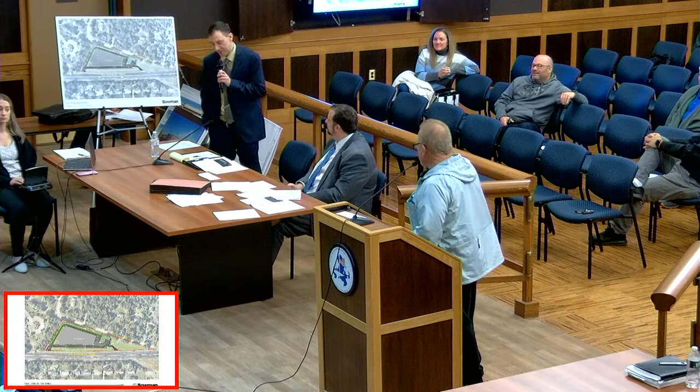Well, I have a 4-bedroom house, and the 2 main bedrooms with the bathrooms to the back of the house face dead center of that building, and I know the lights, and that's going to be a noise problem for me. Maybe a question: could you provide more vegetative buffer in the front of the building? Yes, that's my thought, or a wall. We would be happy to look into seeing if we could do more vegetation at the front. If we can find ways to do that, we'll look into that.

Yes, that's our restriction. We're restricted by what we can and can't do in the easement, so if we can provide more, we will.

On the side, along the whole frontage of the site, there's a sanitary sewer main and easement. Can you provide us with a copy of the sewer easement, please? The other thing we can do, for some comfort, is the applicant has to comply with all state rules, including decibel ratings and everything.

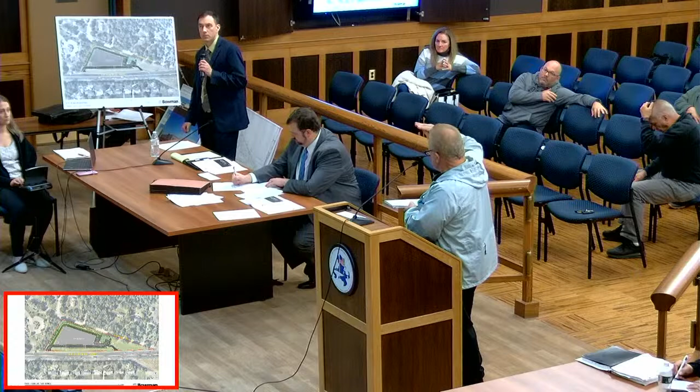My other last question would be the benchmark, where the elevation of the interior floor is. What's the relationship from the benchmark elevation at the mean ground level, where the building is going, to the proposed 26 feet? How is that relating to what's there now? I know the building there now is a little taller, so would this be shorter than that building?

The proposed building is calculated to be 4 feet taller than the existing building. We calculated a 22-foot height above average grade for the existing building. We're going to be 26 feet. Okay, I'm sorry, hang on, I'm getting a clarification. That's it, thank you very much.

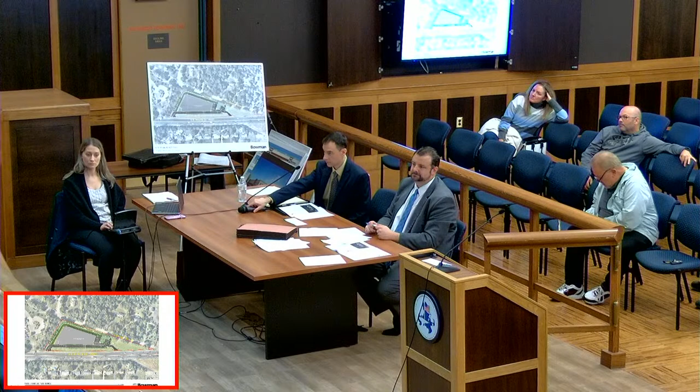This is a busy board for the foreseeable future, unfortunately. On the 28th, we have Somerville Lumber and the CX Tower, a new telecommunications tower near Wegmans. That's going to be a fairly long one. So that's the 28th of November.

In December, we have 1200 Route 22, a large warehouse. And then we have Belly, a dense townhouse development off of Mount Prospect Road in Flanders. It's extremely dense.

The warehouse case, 1200 Route 22, is one we're required by law to hear because the applicant has filed suit. This isn't necessarily a new warehouse application, but one forced upon us by virtue of the warehouse ordinance our township council passed. We're maxed out on time—we have 120 days in which we have to schedule it. We've got to at least schedule it and get approval to carry it, but it has to be scheduled for the 12th.